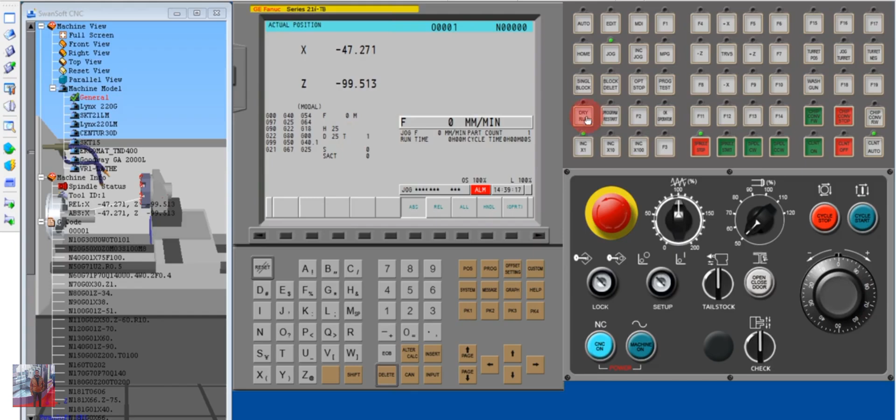We'll learn everything. Let's say you stopped at a machine that doesn't look like this control. It can change completely and still be the same machine like this. This is a control, a completely different look, but it's the same machine, and it's the same procedures and the same operation and the same programming.

And I'll bring you a third look now, okay. Whatever the machine is like when you go to see it, okay.

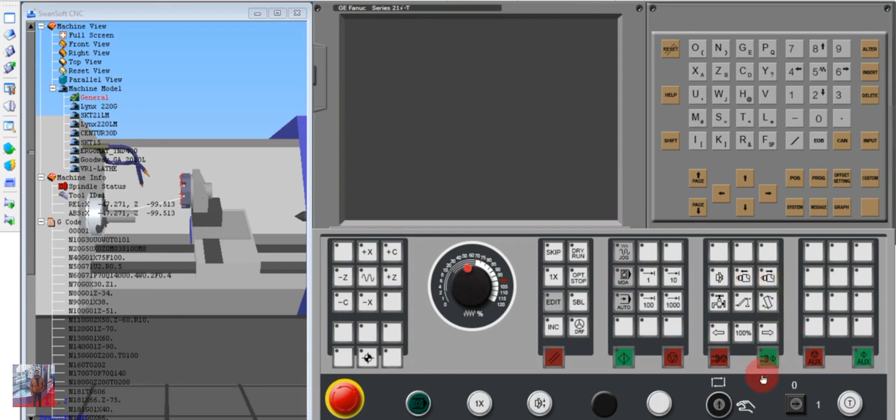This is the machine in front of you. Changing the panel and the numbers and letters and the numbers here. Okay, there's also a different screen. There's a turret and a workpiece here, a turret, a workpiece, and a chuck.

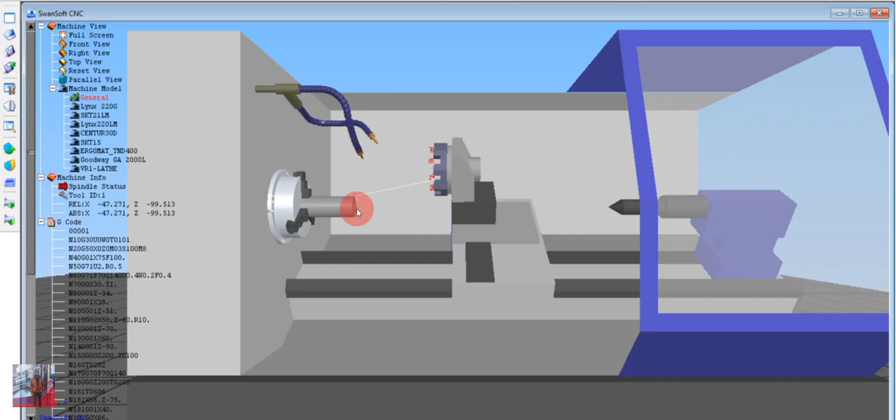Okay, let's open the screen on the machine. Here's the tailstock quill. This tailstock quill supports the workpiece from the front here, it has a center, okay. And the tailstock supports it, especially when the job is long.

Got it. And this is the chuck. This chuck is what holds the workpiece. And this is the workpiece itself. Got it, this is the raw material we'll be shaping.

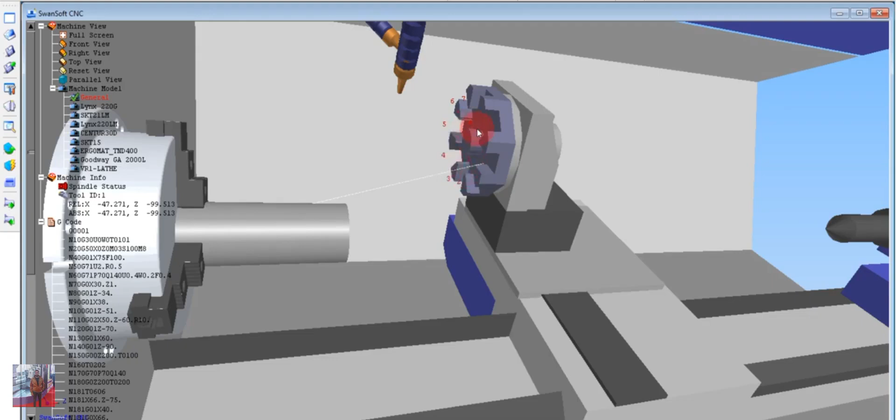Cool. And here's the turret. You'll find it numbered 1, 2, 3, up to a certain number. There are 8 tools that fit in this turret. Got it, that's the basic idea of the machine from the outside.

Here we install the tools in this turret. And here in the chuck we mount the workpiece. And if needed we use the tailstock for support. Got it, back to the screen again.

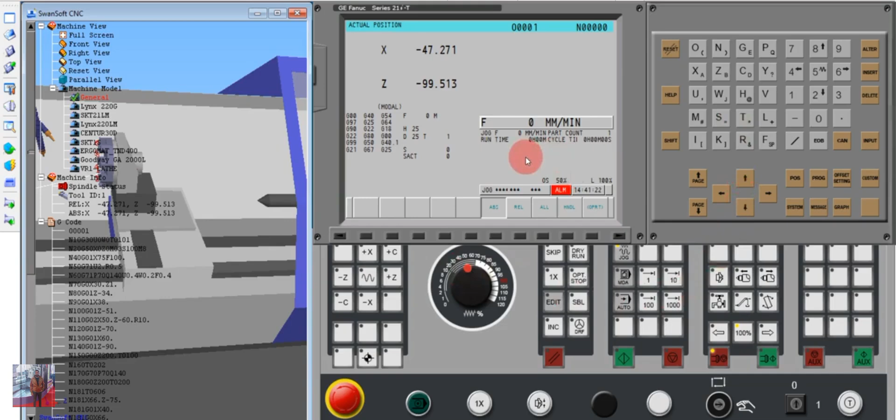And here we do the programming. And something called the offset, which is the tool measurement or the tool start point, and workpiece offset. We'll learn all about that.

I won't make each video too long so you don't get bored, or so the information isn't too much so you don't lose it. Each video I make will be a little shorter so you can handle watching it, and the information won't be too much so you don't drop out of the course. God willing, you and I will learn from each other. I hope my explanations will improve over time and that you'll get the information you need.

So let's agree that what I'm explaining applies to all machines. God willing, the next episode will explain all these buttons. Got it? And I'll show you the tools that are installed in the turret, depending on the job, depending on the drawing I need to shape.

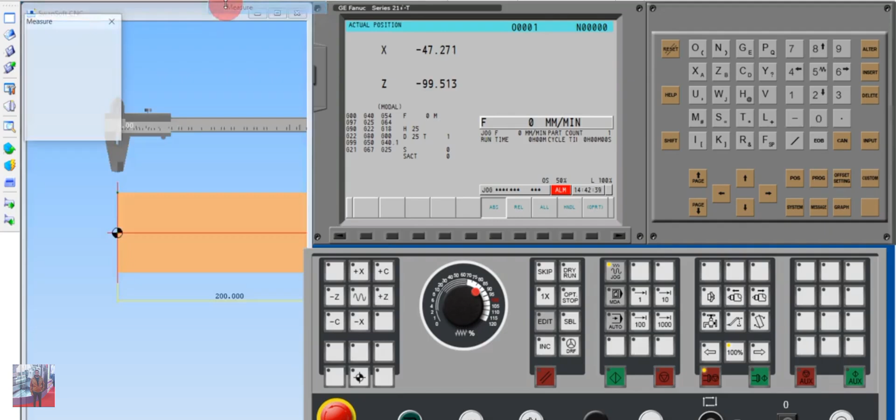We haven't done anything yet, we've only inspected the machine. Got it? And we have to work hard and know how to measure, know how to measure something like this, like calipers. And there's something called a micrometer.

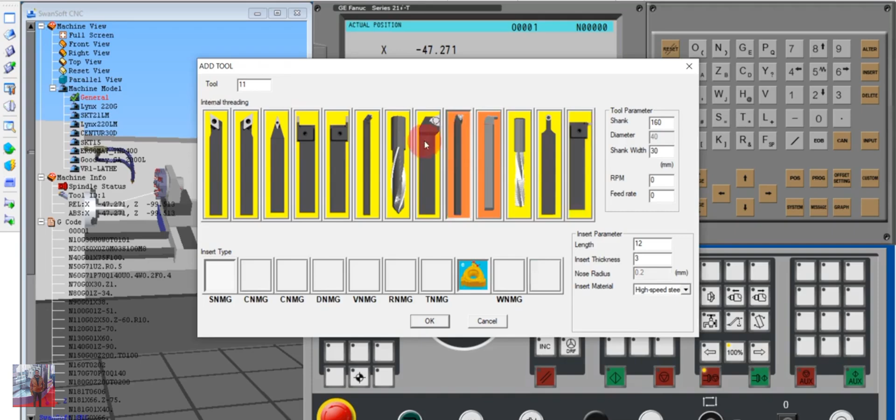Internal grooving, internal threading, and external threading tools. We'll cover all this, God willing.

When you go to work somewhere, they'll show you how to operate it, what these buttons do. It won't be easy, it'll take time. But if you go in understanding, you'll get your money's worth.

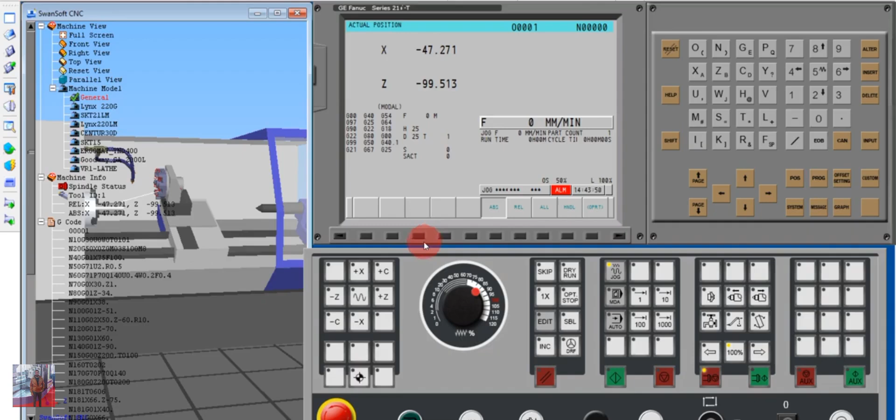And if you understand, you'll grasp the information faster. They won't give you the programming so you don't outshine them. So learn the programming.

This program, God bless it, is great. It's the same machine in every way, it's everything. The wheel moves with you just like the machine, everything you do. And if there's something wrong, it gives you an alarm. This alarm is for opening and closing the door.

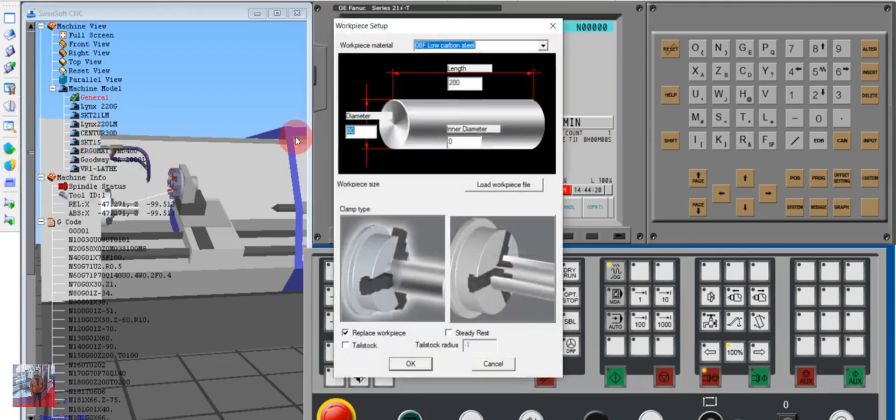Okay? And here you choose the material, diameter, length, and so on. God willing.